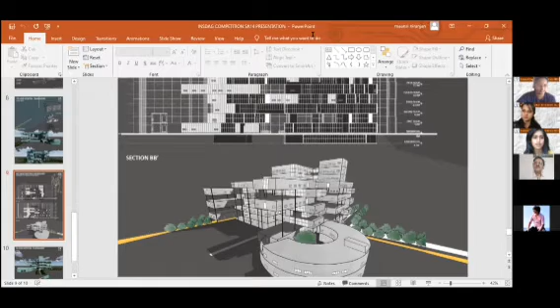So without taking a break, we would ask WA01, the next team, to deliver their presentation. They are Dr. B.N. College of Architecture for Women, Karve Nagar, Pune. So the participants are Kamini Katiyar, Mrunmoyi Kumble, Sanjana Lakhani. They are three members, Sanjana Lakhani, Mrunmoyi Kumble, and Kamini Katiyar. So your time starts now. WA01, start.

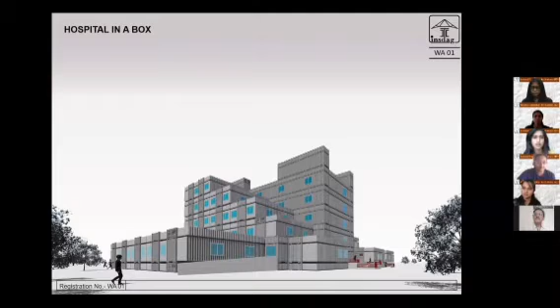Our hospital design has been based upon the concept of hospital in a box. We majorly decided that the concept of our hospital is to be a dynamic pod design. We are making an ideology of revolutionizing pod design into different uses. So we now represent a pod design which can be dynamic and can be taken from one place to another in the form of a medicube as well, and does not need any proper site location as a need. It can be shifted from one place to another, or it can be sent to different locations as medicube centers.

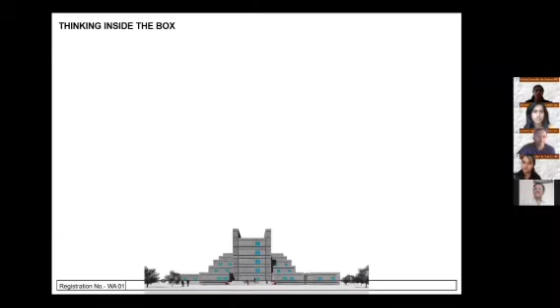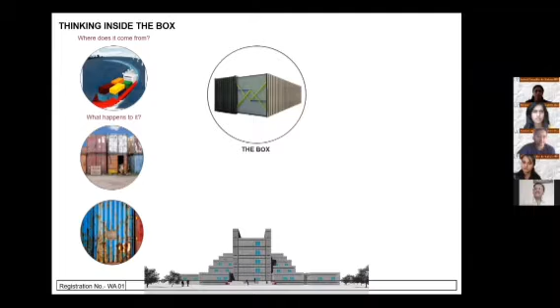So what is the box that we are talking about? This is the box that we are talking about. Where does this come from? This comes from the shipping containers that we have used for our basic module. These are used in water transit for different harbors and dockyards. But what happens to them if they are left after use? They are left for rusting and corrosion and are not properly utilized. And we thought it can provide us a lot of opportunities for design.

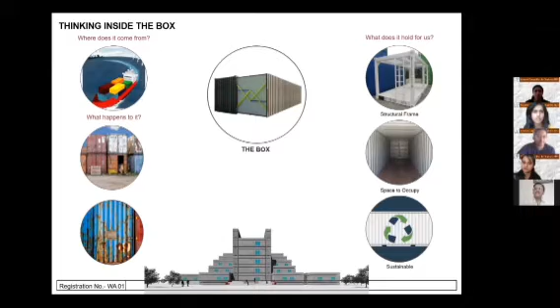So what does this hold for us? It holds a properly maintained structural frame, ready-made to use, a space to occupy that can be modified to fit in many functions, and it is a sustainable and recyclable resource that we need to convert into a habitable space. So how did we unbox this box? By providing dynamic structures and dynamic system mechanisms to it, so that it can expand and increase its volume from a 40 feet container to a 24 feet by 40 feet container. It can increase its volume threefold by expansion on both the sides.

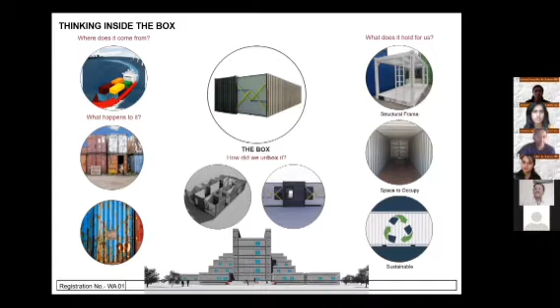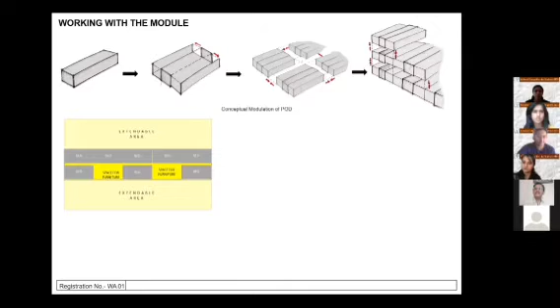So working with this shipping container module, we have expanded it into a threefold volume, spread it horizontally, mounted it vertically to give us a proper built-up structure. So what happens inside this box is, when it is in transit, in a closed condition, it houses all the beds and all the equipment required, along with some ample space for furniture to store for different functions that may supplement this pod. This is the situation in which it can be transported from one place to another without taking all of the furniture in a different setup.

When it is in open condition, all the beds can be taken to their designated places with a nursing station created in the center, which is accessible to all the beds in the designated pod. And in this process, we create dirty corridors on the side, and clean corridors get automatically developed into space formations in the inside of the pod. So this above graphic represents the open and closed conditions of the pod.

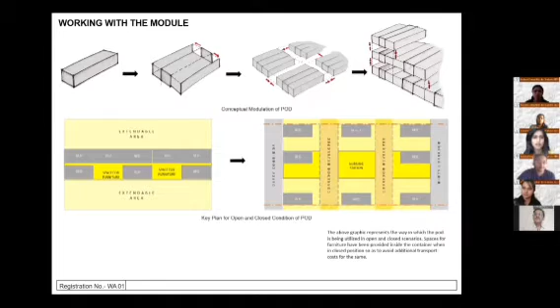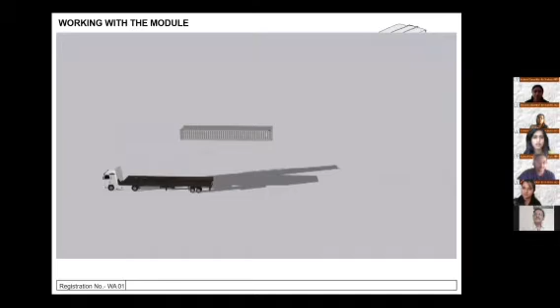So the basic idea of how we are assembling it on site is something like this. We bring it up on the site on trucks, we put them on the site, install them with twist locks, and then we expand them. We spread them on the site in a horizontal manner. Then we lay layers on top of it, and layer by layer, our build-up can be constructed. It can be different forms of varying designs. It does not have to be a single form. It can be started with a single pod as well. It can have modularity in design and shape.

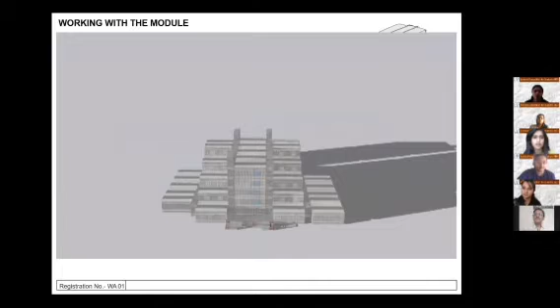So directly talking about the planning on the ground floor level. On the ground floor level, this is the main entrance for the block with the reception in the center, which directly leads to the OPD section and waiting hall. These OPD sections have all the testing areas for the patients. The OPD waiting hall is directly connected to lobbies to all the radiology and path labs for easy access from OPD. This all is conjoined with an admin area in the center that controls all the areas, with doctor's lounge and conference area nearby.

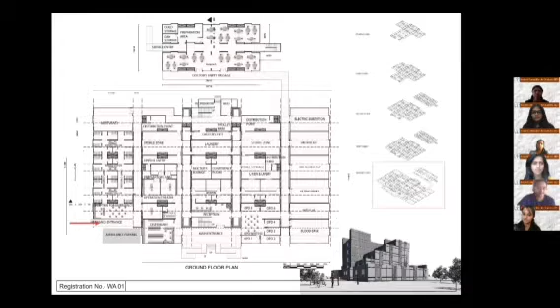Another entrance of the hospital block is the emergency entrance, which has the ambulance parking nearby. This will take the patients to an emergency care unit, which has a different waiting area altogether, with 17 beds reserved for peak hour situations for the emergency area. This has another operation theater area to supplement the emergency in case there have to be emergency operations carried out. In the rear of the block, we have the CSSD, Central Sterile Supply Department, which has different distribution points for clean utility to be taken up to the wards and the upper floors, and a dirty receipt in the center.

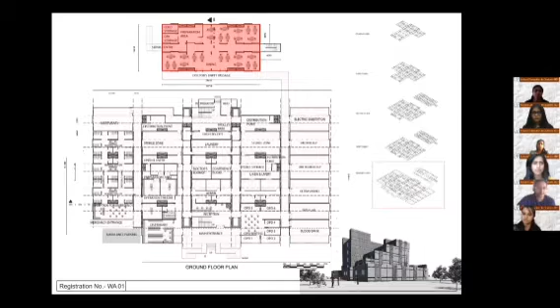And dirty receipt in the center and laundry areas. At the back of the hospital block, we have provided residential areas with a common dining area on the ground floor and residential units on the upper floors. So this basic area statement gives us an area of approximately 9,600 square meters.

Talking about the service cores of our design, the red represents the vertical cores for vertical circulation in the hospital, which are 30 meters apart from each other. The blue ones are the hospital toilet ducts. Each pod has a toilet duct in its premises, and the pods have been placed in such a way that in the center, some of the pods can be put back to back so as to provide combined duct locations in the center.

The green ones in the corners represent the clean utility ducts, which have vacuum pneumatic ducts for taking clean utility from the CSSD to the upper floors to the wards. A similar system has been provided at the end of dirty corridors called the dirty utility ducts, which take all the dirty utility and linen to the laundry area for reuse or biomedical waste to be incinerated.

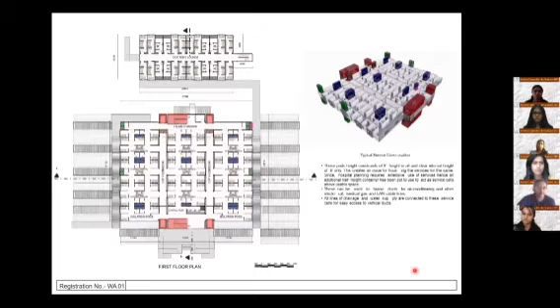So the exploded ISO represents all the service lines that go throughout the site, throughout the building block. This is the typical service core location throughout a single floor plate. In section, if we see, since the height of the shipping container is restricted to 8 feet, we have used a half-height container on top of every hospital floor, habitable floor, which are half-height containers of 4 feet height. We are using these pods as service cells, and these reduce the requirement for putting a false ceiling inside the hospital habitable building.

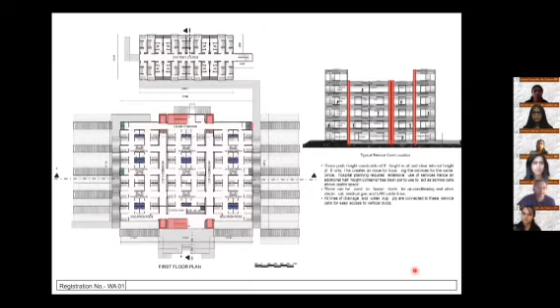Reducing the size to much lower. All these service areas run parallel to the floors, and all the service lines can combine and then be taken down via these vertical shafts towards the plinth, where they can be exited out. In the other section as well, we can see all of these service cells continue throughout the corridors as well and have internal partitions so that the air circulation remains separated for the wards and the corridors.

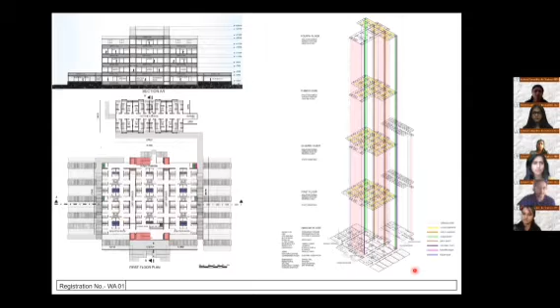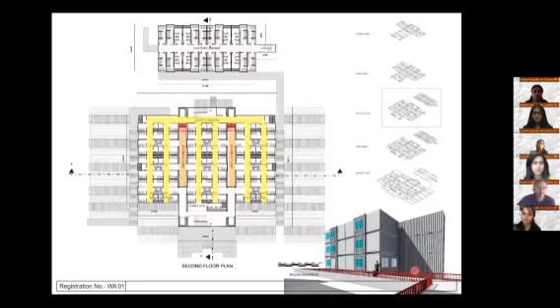Circulation of the hospital. In yellow, we see the clean corridors. All of these corridors have been developed by removing furniture inside the pods and are automatically developed due to form evolution. And all of these lead to clean utility ducts at the end, which, as I explained earlier, are connected to the CSSD. The orange ones represent the dirty corridors, which will take to the dirty utility ducts directly down to the incinerator and laundry areas.

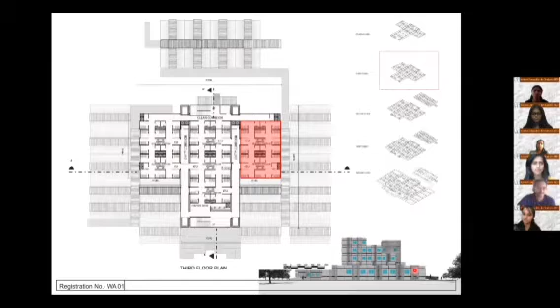Going to the third floor, we have separated all the critical areas like ICUs and CCUs on the top floors so that the patients can be segregated vertically depending upon their conditions, as per how much health deficiencies they are facing. And these can be separated so that all the patients who can be easily discharged do not have a longer waiting time, do not see panic situations created near ICUs, and they can be separated from the ground floor as well.

So what happens inside a single pod? A single pod has two clean corridors inside it, with a common toilet area for these beds, along with a duct which is formed with the floor plate, and a common nursing station catering to all of these, so that the nursing station is not far off, and these nursing stations take care of all the patients in the single pod.

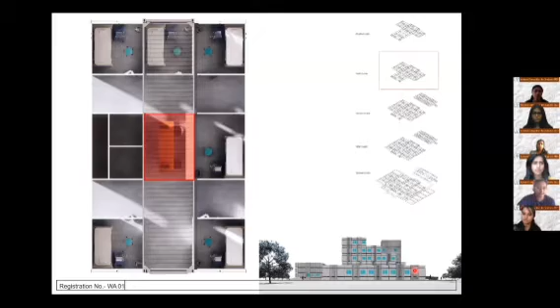Going on the fourth floor, the uppermost floor, we have pediatric wards and a PICU in the center. All the pediatrics have been shifted to the upper floors so that children can avoid panic situations and can be treated in a different manner, and they do not see all the older patients getting treated or moved about. We have also provided a library area keeping in mind social distancing and lesser seating spaces inside for the leisure of all the kids there.

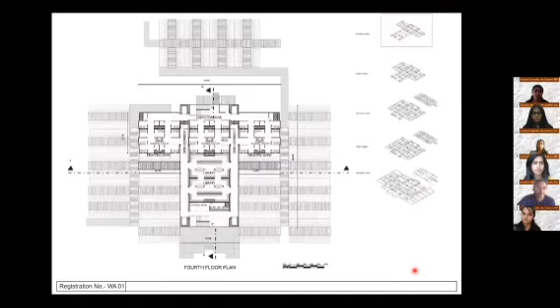All of this happens within a 100-day work schedule. We have made this work schedule keeping in mind the following procedures: the procurement and fabrication of the shipping container, installation of the expansions and scissor mechanism, cutting and making of all the provisions required for window and door fittings, provision for services, internal work including internal planning and wall finishes, door and window final fixing, painting and finishing of interiors and exteriors, and finally transporting it to site for site installation.

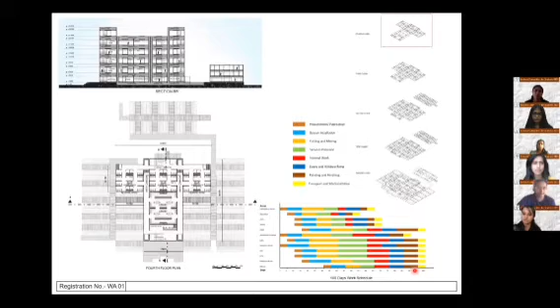But the plus point of our project is it does not have to be a complete built-up structure for functioning. Since it's a pod design and each pod can individually function, it can start within a 50-day span after constructing the ground floor. And as and when these pods are constructed, these can be mounted on top for completing the built-up structure. In a similar manner, this whole hospital can be dismantled and taken to different places. And when COVID patients are reduced in number, these can also be sent to remote areas where such facilities are not available, acting as medicubes, providing direct medical facilities without changing much of the structure.

So talking about the structure of the pod, it has basically the structure of a shipping container with metal folded plate walls and fold angle columns which hold these walls in place. These columns are held in place by cast column blocks, corner blocks. These corner blocks have provisions for locking arrangements of twist locks.

What we have introduced in this structure is the scissor mechanism, which is captive or is housed inside the fold angle column, which can be opened up for expansion. There are also expanding mechanisms for holding ceiling plates and floor plates. The floor plate of the original shipping container is made of metal plates supported by ISMC channels, ISMC 200 parallel channels in the center, and ISMC 250 channels running all along the length of the block.

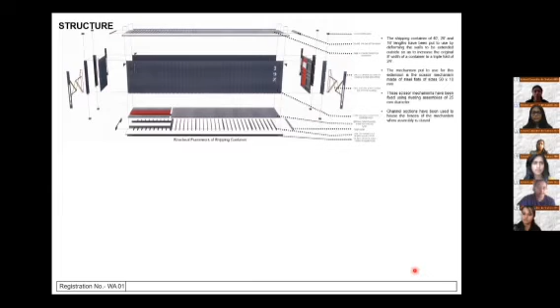The shipping container sizes are 40 feet, 20 feet, and 16 feet in length with an 8 feet width. And when we open a box, the width changes to 24 feet. The mechanism fitted is as per standards of shipping containers. The scissor structures that we have installed are made using steel flats of 50 by 10 mm. We have used such a size because of the restriction of the space inside the angle column of the shipping container. Hence, we have got a scissor mechanism.

This scissor mechanism that we are representing now is for the service cells, which are smaller in height. Hence, they involve a symmetrical scissor opening mechanism, which opens in a linear fashion, as shown. The wall has been assembled with 5 layers so that it is insulated acoustically as well as it has heat insulation. So this is the assembly of the wall.

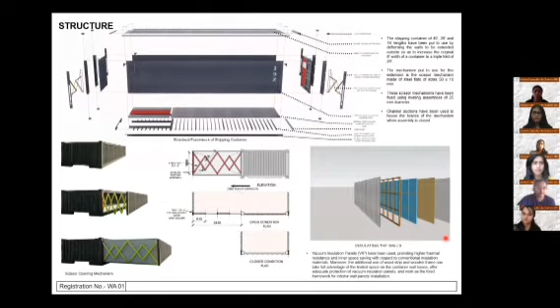It has folded plate, then a wooden fixing which holds the acoustical blocks, a cork board, and at last an acoustical gypsum board that also heat insulates the wall from external side conditions and also keeps it acoustically sound. So this is the fixing of the external wall.

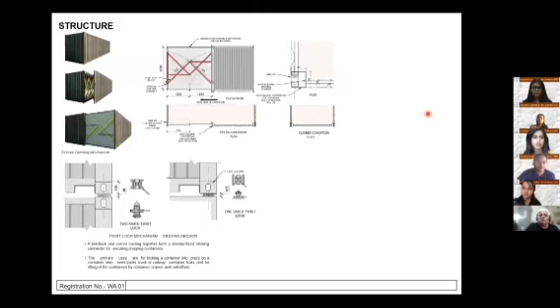For internal walls, we have used LGSF structure, light gauge steel framing structure, which is something like this. The panels are made up of gypsum boards, all fixed onto a metal frame system, steel frame system, which houses a gypsum.

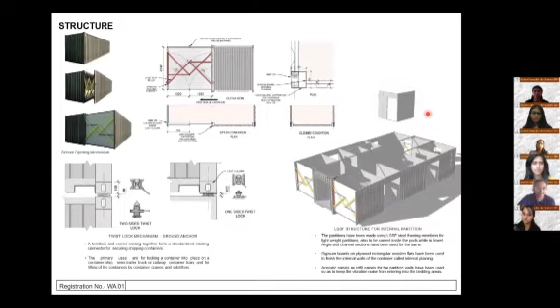Could you please start the...

So on every floor, we have an entrance lobby, which has ambient lighting and has a control kiosk, which has all the patient data on the floor. This control kiosk is only for doctors, which has patient record data, patient intake and outtake data.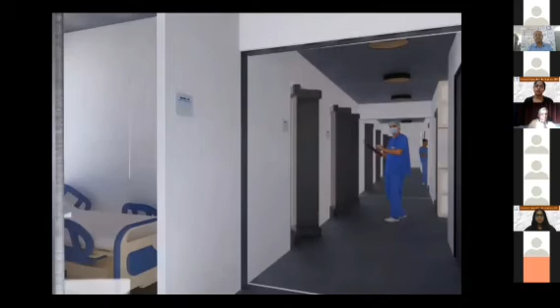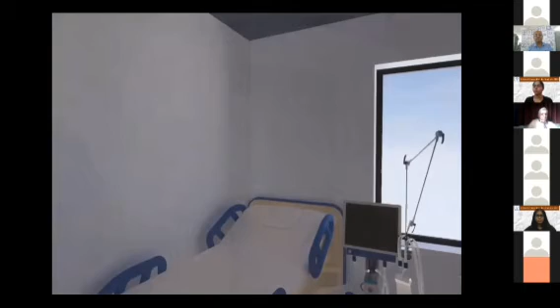All of these corridors are directly connected near the control kiosk with ambient lit corridors, and all of these have patient name tags, which represent the date of entry and exit of the patients. As you see, we have also tried to use the doors, which are foldable panels, so that even these doors can be folded up and brought up in a pod and placed directly on the side while fixing.

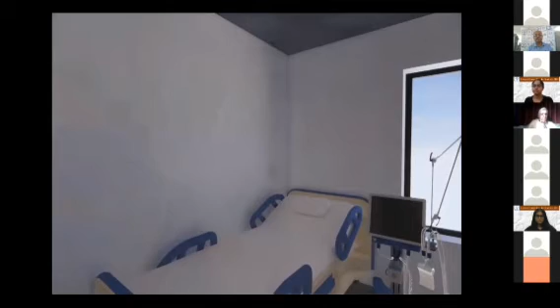A single pod or a bed area has area for surplus oxygen cylinders, as well as the monitoring facility, auxiliary monitoring facilities. All of these pods are connected with a single corridor on all sides with adjacent nursing stations. These nursing stations are connected to all types of corridors, whether they are clean or dirty corridors.

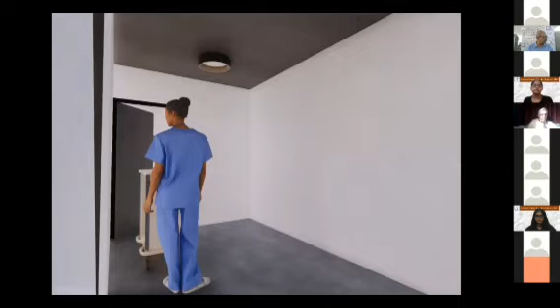As we see at the moment, we are now moving from a clean corridor where all the nurses have collected the dirt received from all the wards, and their linen, etc., have been collected, and they can go to the dirty corridor. From there, the dirty corridor waste is taken to dirty utility.

As you now see, we are here in the dirty utility area where there are pneumatic ducts. On the right hand side, these pneumatic ducts can be used for throwing out the biomedical waste to the CSSD area, where they can be treated and then taken to the incinerator.

And there are also linen chutes in this area, which will take all the linen waste or the patient clothes which they were wearing to the CSSD and laundry area for further sterilization and reuse.

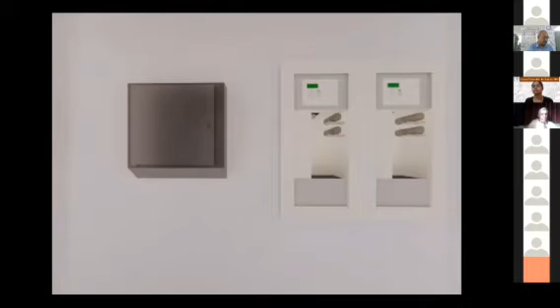Could we move to the next slide?

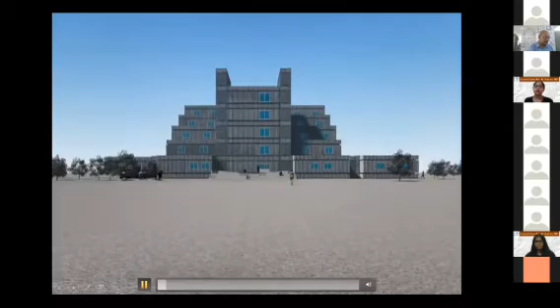So this is the basic view of our model. So as we approach the site, we see the main entrance here.

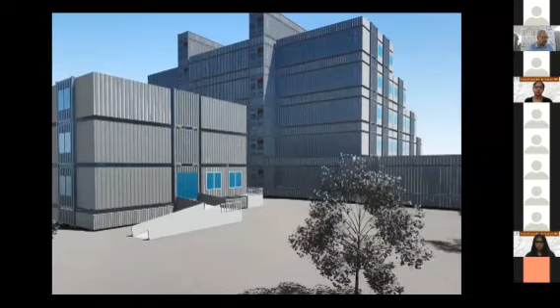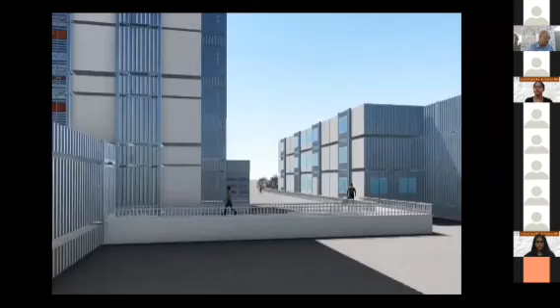Now we are moving towards the emergency entrance with the ambulance parking nearby. This emergency entrance takes you to the lower level emergency care units. At the back of the hospital block, we have residential quarters so that they are not directly in view from the main road, but they are still accessible from inside of the hospital. We see these connecting areas with ramps and all connections with corridors to the residential block.

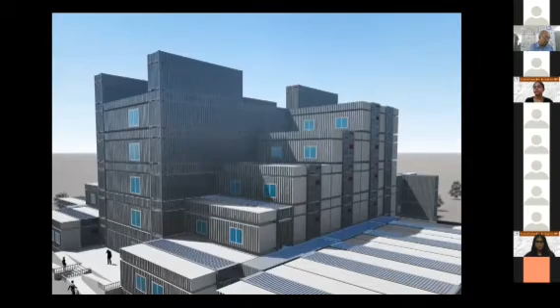So this is the kind of aerial view that our modular design presents at the moment. Yes. So in the end, we would like to say that for us, a box is a psychological concept. It holds what our heart desires and it shapes what our mind idealizes. So it's up to us what we make of it. We can change the form, play along with it, but the box will still remain the same. It's like a piece of Lego that we want to create around and create a better building with this block.

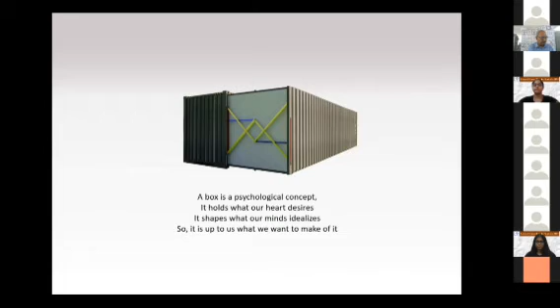So thank you. Thank you, team WA01. Now to the juries, Dr. Deshmukh. Yeah. So, Mrunmayee and team,

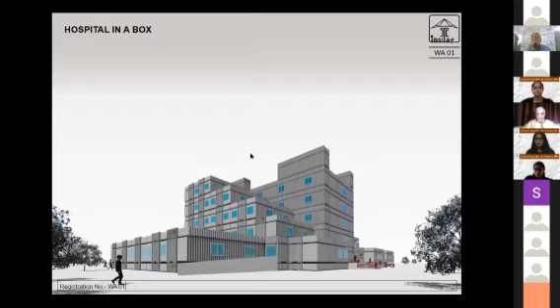we have seen your design in 2 stages. What I liked in your design is the portability, because it's a very thoughtful idea of using shipping containers, which many times become useless because of their overuse. And then hundreds and thousands of containers are lying on a stockpile somewhere. So you have actually done the right use of such containers and very thoughtfully connected them with each other.

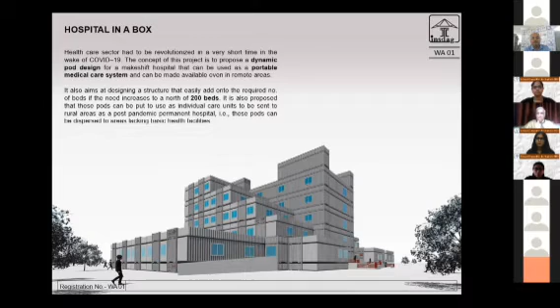But what I don't understand here is that the containers, like in a ship, they can be put over each other. But when you want to create a building, the containers cannot be simply put on each other. They need to be properly connected so that it becomes one building. Yes, sir. I think if you can throw some light on that, it will be nice. So we have a structural detail of it. Can you go to the next slide, please? How the containers are connected with each other properly.

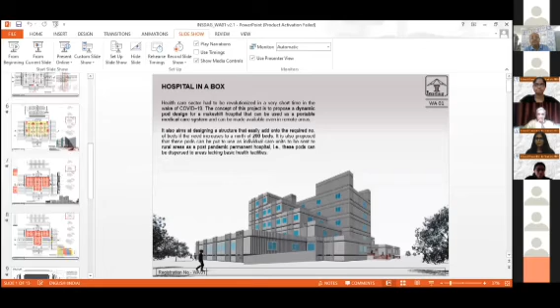Bring me the next one. Mrunmayee, can I have the screen sharing rights, please? Yeah, that is expansion, yes. Mrunmayee, can I screen share, please? Just 2 minutes. Can you explain in a different way because it is not functioning? Can you play this slide? Yes. Move.

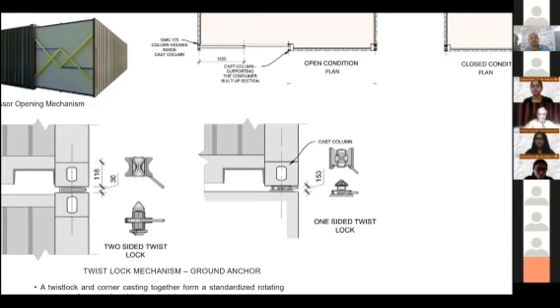Yeah, that is expansion, sideways expansion of the container to become more spacious. But what about one container over the other? How is it connected? Yes. So as you see on the screen now, we have found this system which is called a twist lock mechanism. Twist locks are locks which are specially designed for containers only. One-sided twist locks are for plugging into a foundation or directly on the ground. Two-sided twist locks are for plugging these on top of each other. These have a lever which can be moved up and down so that the connection can be loosened and dismantled on site. And this reduces the need for creating a direct column through and through. Like we use in RCC, we don't have to put a continuous column, but these can be stacked upon each other using these twist locks.

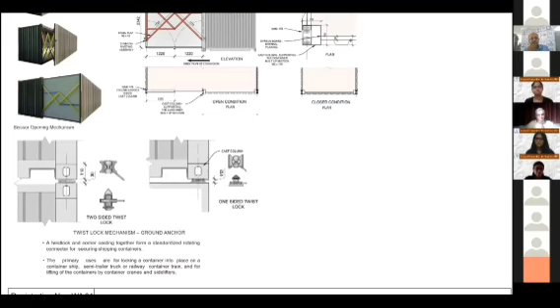Yeah, so the idea is quite good because you've directly taken it from the containers which can be arranged on a ship. But here it is a building and you are going to go for a couple of stories, not just one container over the other container like in a ship. Here you're going to stack so many containers on each other. So will the same idea be all right here, or do you want to design it in a different manner?

So we did a bit of research on these twist locks. Okay. They have been proved to work up to a height of 6 containers, and hence to be on the safer side, since we are using service cells as well for half-height containers, we have restricted our height to only 4 containers on top of each other, only 4 floors with service cells. All right. Hence, we believe this system should function for the building height that we have taken. All right. Okay. Thank you. Mr. Bhattacharya.

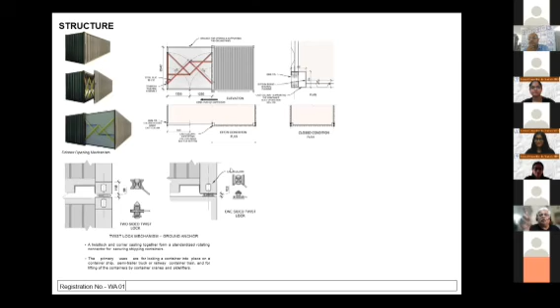Again, they have come up with a very novel idea. I was mentally thinking that these are bricks, and now we are stacking up bricks upon bricks, and the mortar is the lock. Yes, sir. So on a novelty factor, this is a very new thinking, and you are using something which is already readily available in the market. Hence, your time factor will be very nicely gained. So on those points, you are very nicely gaining.

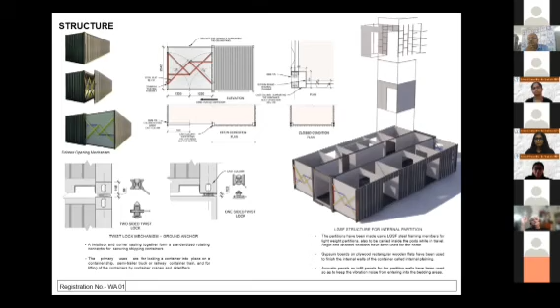I do not know how much, because it would be having fixed dimensions, and you have to play with the fixed dimensions. So you have to plan and fit in everything with the things you have, or you have to make customized containers. But your plan is not to go in for any customized thing. So that is the only catch.

On that point, I would say it was not very different, but from novelty and the fast pace with which it can be done, and if the serviceability and functionality can be maintained, the idea is absolutely novel. So that appealed to me. Yes, sir. Thank you, sir.

So shall I go to the next jury? Please. Dr. Arup Sarkar, please.

The idea is very novel, but some more exploration could have been done. Like when we are stacking one container above the other, how are the services reaching in? Are there smaller areas or ducting in between the containers or on the side of the containers? So anyway, the idea is good.

Another little doubt is that when we are stripping the walls of the containers, because sometimes it may be necessary, how can the shear stress be taken by the containers, whether there is sideways sway in the structural grid. If we consider the structural grid in the corners of the containers, how will cross bracing be addressed? So anyway, student level thinking is very nice, very innovative, and futuristic too. Best wishes.

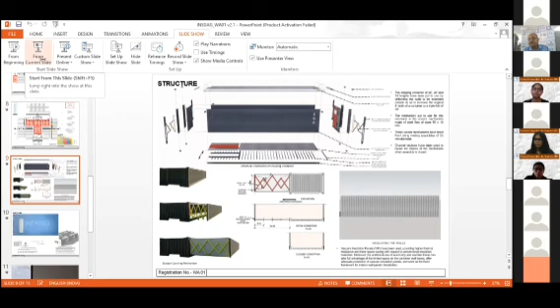They have got certain sizes. Containers are 8 feet normally, right? Yes, ma'am. Not more than that. So you have said like 4 feet above those, and then you are making those service corridors. How will those service corridors be ventilating? You should be thinking of making mechanical ventilation into the middle of those boxes, no? Is that what you thought of? Did you think about that?

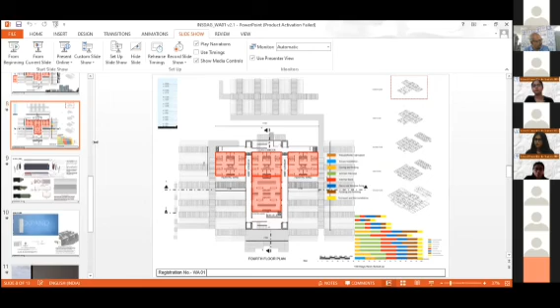Yeah, what we have done is we have provided service cells which are half height containers on top of every floor, and those have internal divisions which control all the mechanical airflow. Can you play the slide?

Yeah, understood. So basically, suppose one part has to be made AC. From that service corridor, the ducts will come, because it's only 8 feet high. Height is very less, isn't it? So that has to be addressed, how you can increase the height, because these restrictions are there for shipping containers. You can use them in small units in hospitals. You have to think of some other innovative ideas on how to increase the height and how to ventilate inside, and functionality has to be absolutely right. So that's a very novel idea, definitely novel.